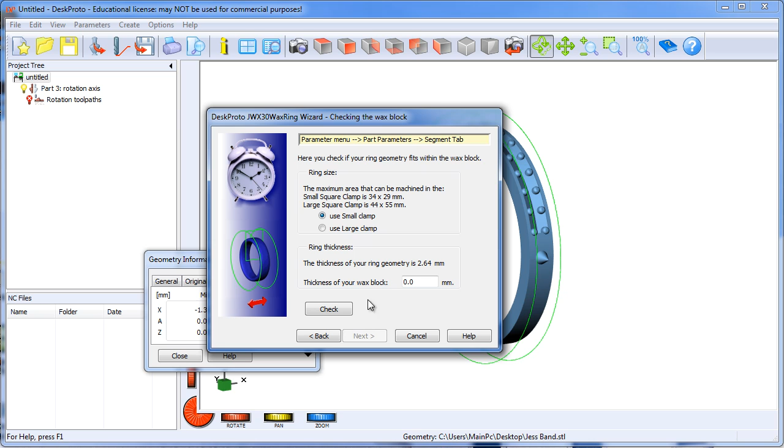I've actually cut this band once, and from that I've come to understand a problem. I haven't removed that yet because I have an idea on how to repurpose it rather than remove it. I've fixed this so it'll go down to 6.

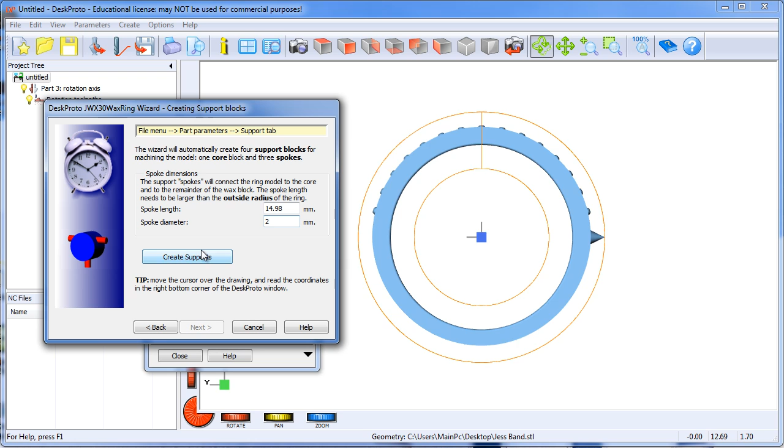So all that's good. Something I figured out: when this thing creates its blocks, it cuts right next to the very outside of the ring, and the wax I cut earlier was very difficult to separate. When you create these supports, it actually cuts through next to it, but that's such a small area to work in that it's difficult to get a saw blade in there to split it off.

So I was thinking, if you added an extra 2 mils - what's that, 14, basically 15, make that 17 - then you've got an extra bit of leg over there, and you can just put in a 2mm or 2.5mm drill. You can drill through here, through there, and actually separate this.

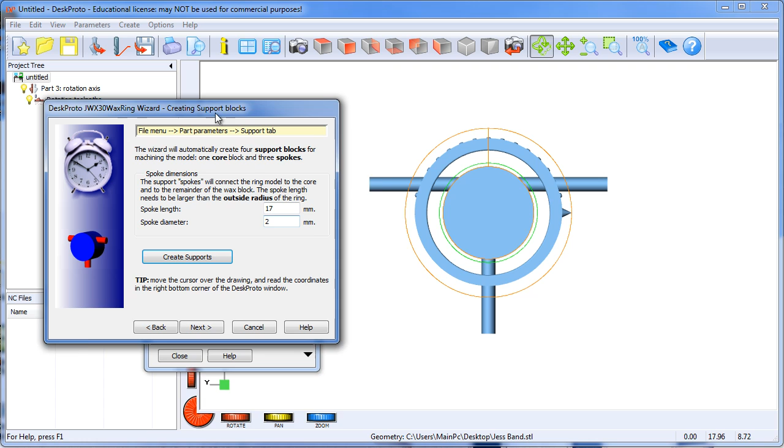Now the three unused 2D operations over there, I'm thinking of repurposing them to do exactly that after the cut is done, to just drill through with a 3.17 through those 3 legs.

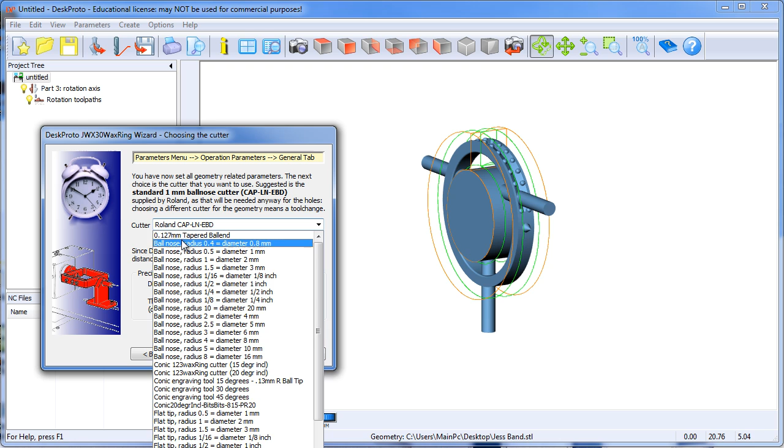Alright, so anyway that's all done. The rest of this is working pretty much great now. I changed quite a few things again. Let's go next, create the paths.

So when I did the roughing using the standard system, this was really bad. Okay, let it start generating, I'll tell you about it. What was happening was the roughing would cut one pass, but it was set to run parallel, and it would cut through here, pick up, go over the hub, and it would take forever - just cutting air, basically not doing anything.

I may also change that for the finishing pass, since I can't - there isn't enough left in the roughing. Or I may bring back that spiral operation. That means the finishing pass you can actually cut as a radial pass.

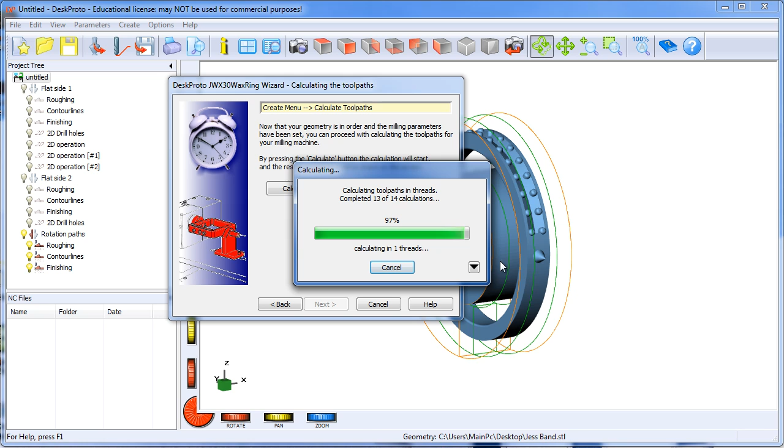Okay, so that's done. Next and finish. Close, finish. So I'll show you what I changed inside there. Let's turn that all off so you can see what's going on in there.

So that radial path, you've got 2 of them in there. One goes all the way over the first roughing, that fella up there, and then the second one just does a little flip through there. You can actually see where it turns around in here - you can see the little turns there.

So the first one will cut the hub area and all the way across. The second one will only cut over the ring around like that. So you aren't wasting time and pathing time. That worked out quite well.

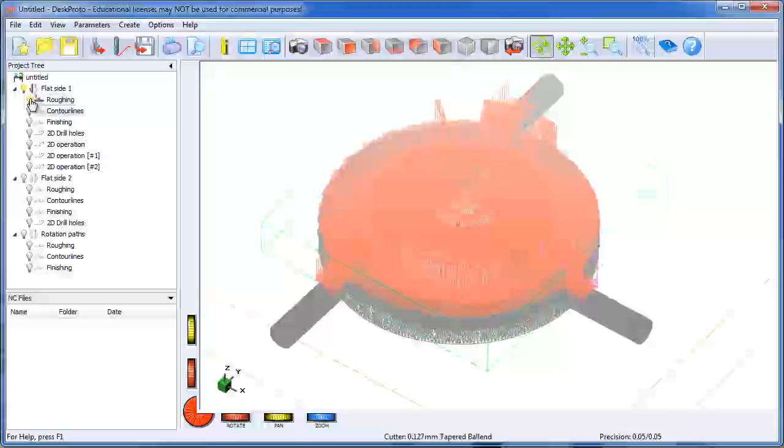Other than that, I don't think too much has been changed. What I'm going to do, like I was saying earlier, is repurpose these 3 wasted 2D operations sitting over here.

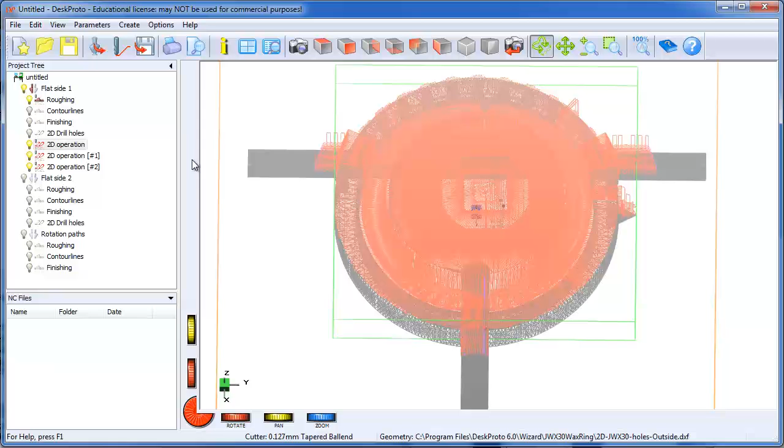I need to read up on the code to find out how to detect where that edge is. I do remember reading it in there, and then just offset that maybe 0.5 millimeter and run a 2D operation to plunge the cutter straight down and cut a circle there, there, and there.

And then, because the finishing pass cuts right around that on every side, you should be able to just push it out with your thumb and the whole thing will fall out.